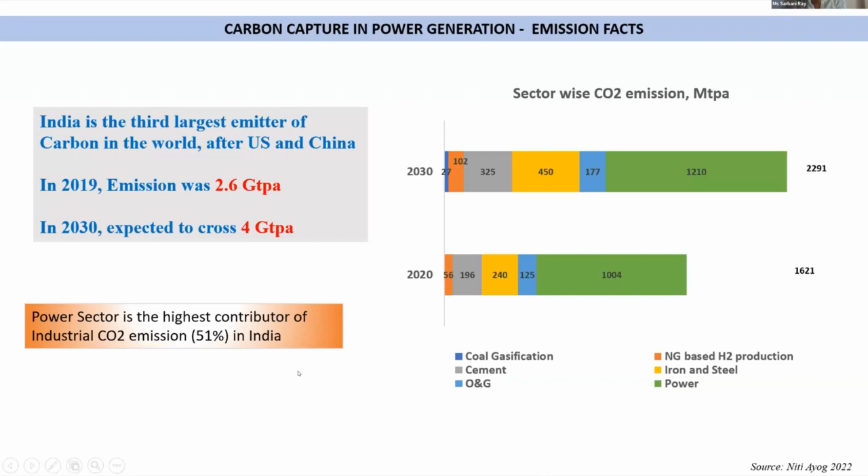But anyway, that will come later. So first we see that the power sector as of now is the highest emitter, highest contributor of industrial CO2 emission, that is 51%. So we need to really worry about the power sector.

So what is the installation capacity and fuel mix? I'm just giving these details because my subject is very theoretical. So renewable is 30% and thermal is 57% in our fuel mix. Last year, by June 22, renewable was 26% and thermal was 60%.

So we are progressing at a very great rate in case of renewable. But is that enough? Renewable has shown a steady increase from last year's 26% to 30% share in the fuel mix, and in the same manner, percentage share of thermal has reduced. India's revised renewable power capacity target is 500 gigawatt by 2030.

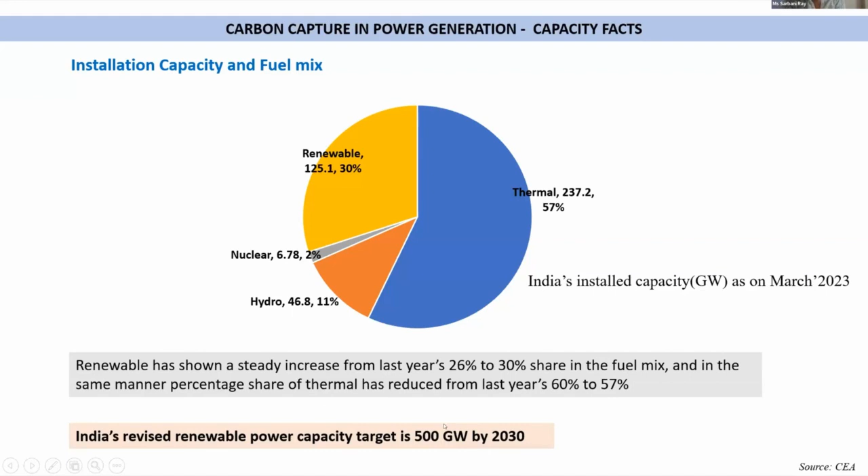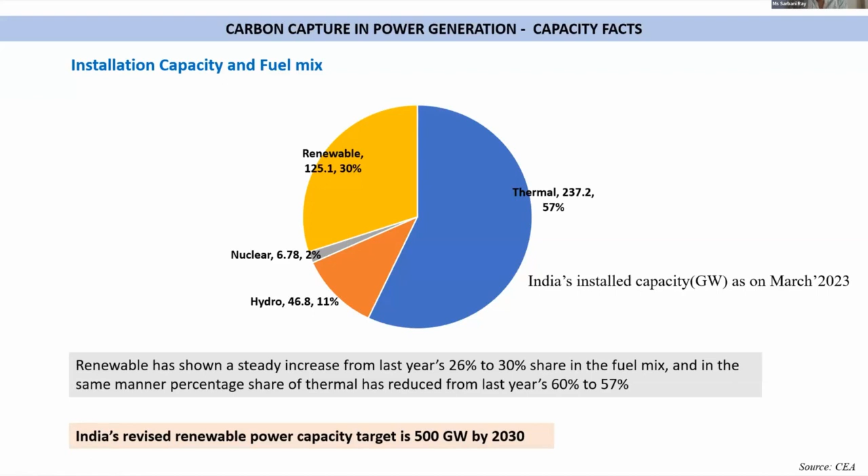Still, if you see our 2022 target, we have done really great on that target. Our policies, luckily the cost, the scale, the learning - everything together - the price has come down and India has done a great thing in renewable capacity addition.

Energy demand of India would increase as per the IEA latest India outlook, by 25 to 30%, and 60 to 70% by 2040. So that's what I was saying - we are in a very comfortable position now as per our per capita emission, but it will not be like that for long, because our demand will increase and our electricity share in the energy will increase since we are on a growth path.

So even with a considerable share of renewable in the fuel mix, coal will be required to meet 50%. That is the IEA prediction in all scenarios, including good scenarios like steps and sustainable development scenarios - still 50% of the electricity demand will come from coal by 2050. So coal would continue to be the major fuel source for the Indian power sector for the following reasons.

If you see the relatively new infrastructure of existing power plants - this has been discussed for some time by IEA and other major energy agencies - that the Asian fleet of power plants, India included, is very new compared to the rest of the world.

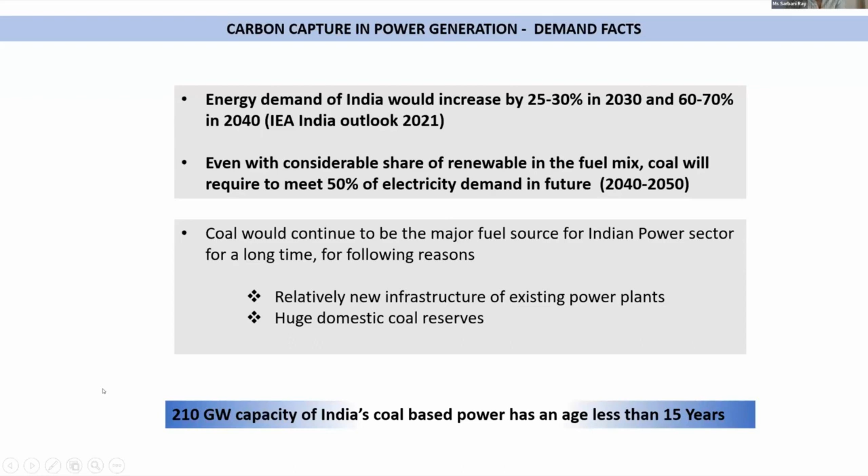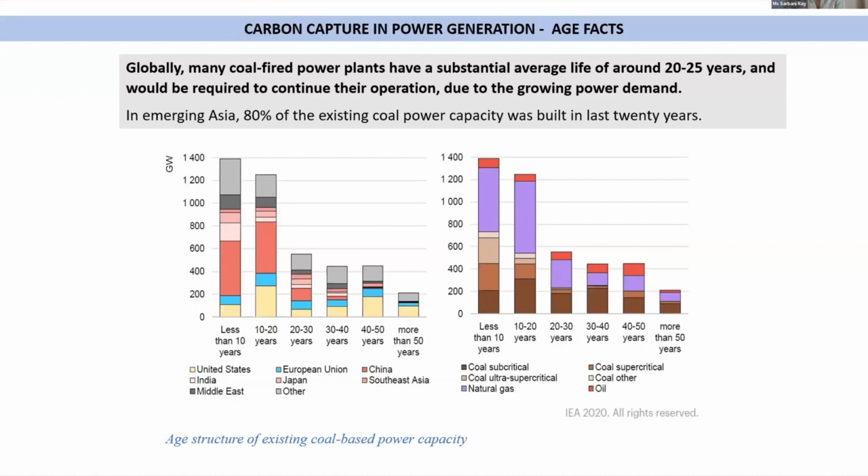So compared to other CO2 intensive sectors, now comes the renewable. Where does renewable stand? Because the power sector has an advantage over other sectors in that it is already going through decarbonization using renewable technology, which has progressed very well over the years. So renewable energy is predicted to achieve 30% of required decarbonization in the power sector. Even in 2050, when renewable power is expected to cross 50% share in the fuel mix, we would require coal power or fossil fuel power, because for us, natural gas is what other people use, a much cleaner option, but we cannot do that, we don't have gas. So due to the variable nature of renewable power, we have to meet base load power demand with coal.

The IPCC working group, the International Climate Panel, has already declared wide-scale deployment of CCS as key to how we are going to do decarbonization. And IEA also, in their sustainable development scenario, has shown that CCUS in power plants would deliver 5% of low carbon electricity. So out of the decarbonization, if 20-30% is done by renewable, 5% decarbonization will surely be done by CCS. That is how they are predicting net zero by 2070. Whichever country is working out a roadmap for net zero, CCS is a part of it. In fact, CCS is the oldest technology being considered as a major tool for decarbonization. It has been there for around 50 years now, but the technology is only evolving recently.

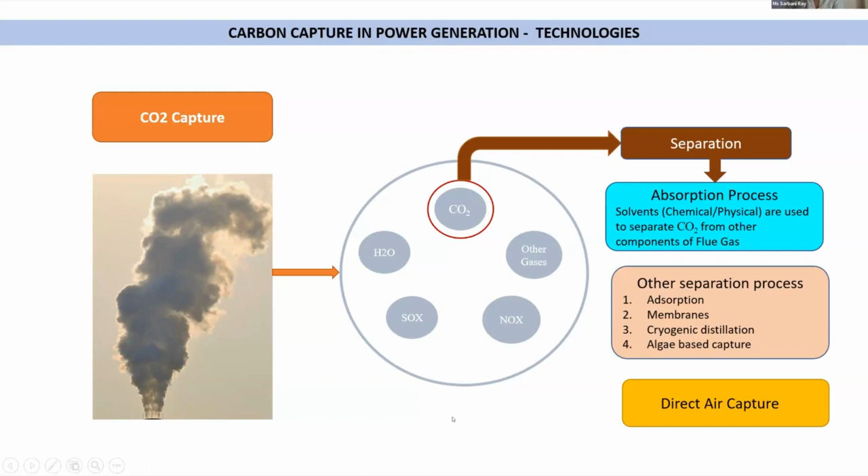There are three main technologies for CO2 capture in power generation: post combustion, pre combustion, and oxy-fuel combustion. Post combustion is when we capture the CO2 after fuel combustion, using separation methods after the fact.

Based on where separation happens, these are the three divisions. Post combustion captures CO2 after fuel combustion, and can be retrofitted to existing plants. It can basically be applied to all types of facilities. Pre combustion is capture of CO2 before fuel combustion. Post combustion, as you see from its color, is the most developed technology.

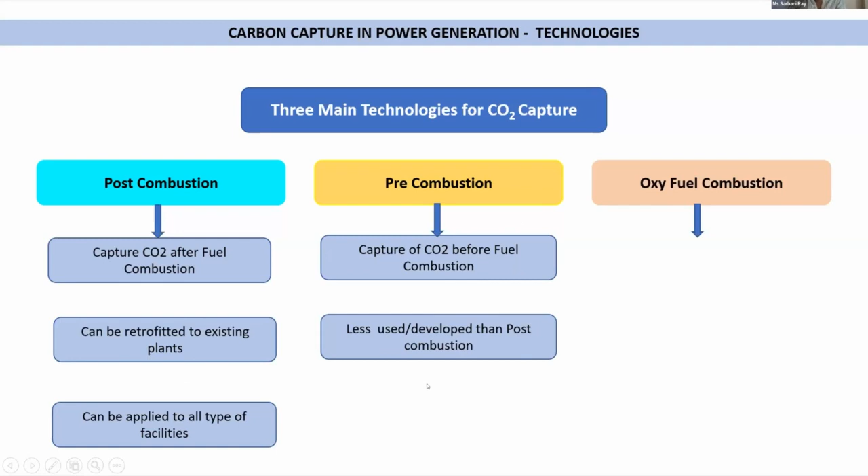Pre-combustion is in early development, capturing CO2 before fuel combustion, and is less developed than post-combustion. It can only be applied to power plants and limited facilities. These are early days for declaring such classifications, because pre-combustion is not developed yet. Something might change in a year or two.

The oxy-fuel combustion method is one people are very attracted to, where capture happens after fuel is injected with near-pure oxygen. For this we need an air separation unit where pure oxygen is generated, and that oxygen is used for combustion instead of air.

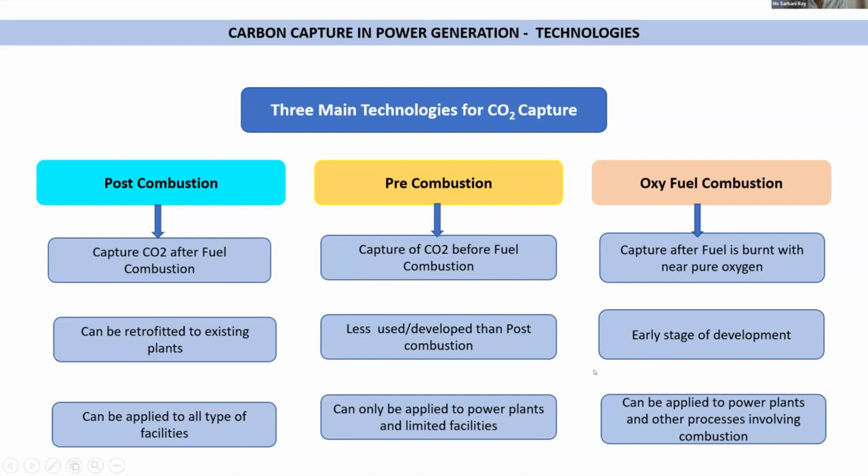This is a very early stage of development, but people are working fast on it because oxy-fuel combustion has its own great advantages. If proven, in later stages we may be using oxy-fuel combustion only for new power plants. It can also be applied to other processes.

Now, the advantages and disadvantages: post-combustion achieves 90% capture, and pre-combustion is also 90% capture. Oxy-fuel combustion achieves 100% capture with the highest degree of purity. The purity of oxy-fuel and pre-combustion methods is not yet fully proven.

That is the best thing about post-combustion: you don't need to change your fundamentals. You can retrofit easily. That's the main advantage, at least for old coal-based power plants. That is the major advantage.

And the disadvantage, of course, is CCS. We need a lot of money for CCS. That is one reason CCS has never developed so much. High capital investment, and energy penalty is very high in case of post-combustion, because the regeneration of solvent requires high steam injection. So energy penalty is almost greater than 30%.

Then there's an increase in generation cost. It will increase the cost because it is taking the steam either from the existing facility or building a new facility to provide power or steam to the CCS. So all of these are actually high capital investment.

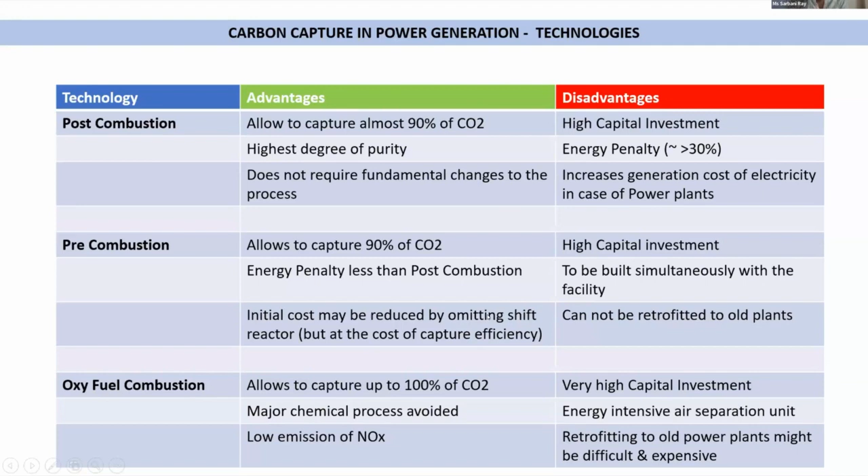So for coal-based power plants, the IEA released that, depending on the maturity levels of the technology, the most suitable technology as of now is post-combustion chemical absorption. All other technologies are in progress. The chemical absorption technology is in early adoption stage, while the rest are in prototype or demonstration stage.

There's also the question of whether to use chemical absorption or physical absorption. For now these two are developed, mature technologies, and the choice depends on your field of application—whether oil and gas, other industries, or power plants—and on the concentration and partial pressure of carbon. In our coal-based power plant flue gas, the concentration of carbon is very low and the partial pressure of carbon is also low. This makes amine-based chemical absorption the most suited technology for coal-based power plants.

So what is your solvent? It depends on whether you use chemical solvent, and what type of chemical solvent you use—that depends on the concentration of CO2 and the partial pressure of CO2.

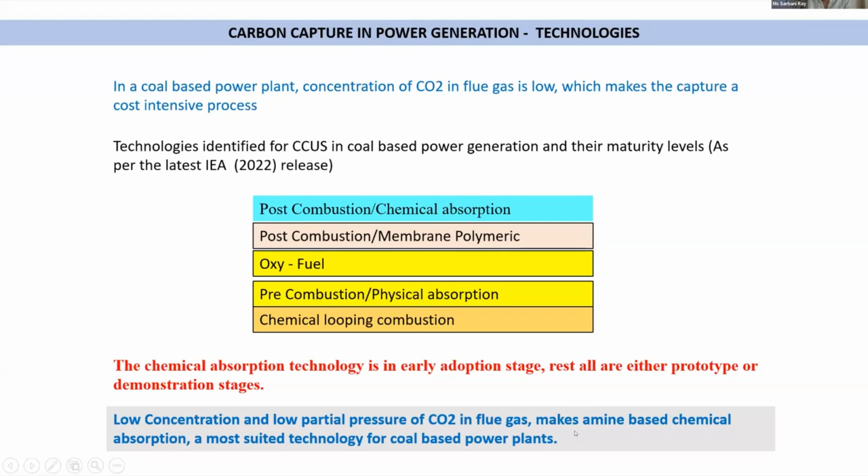This is a typical schematic drawing for carbon capture in power plants, based on post-combustion chemical absorption. The flue gas reacts with the solvent, which absorbs the CO2 in the flue gas. This is an exothermic reaction, so it generates a lot of heat. Flue gas needs to be cooled before sending it to the absorber.

Flue gas cooling is done using a heat exchanger, and then the solvent absorbs the CO2. This CO2-rich solvent goes to another separation tower called the stripper tower. In the stripper tower, the solvent is regenerated using steam, and the CO2 comes out as a pure gas. The lean solvent, without the CO2, is pumped back to the absorption tower using a pump.

Then, depending on the use of CO2, it is compressed and liquefied, and then either stored or transported through a pipeline. That all depends—this is just a typical process.

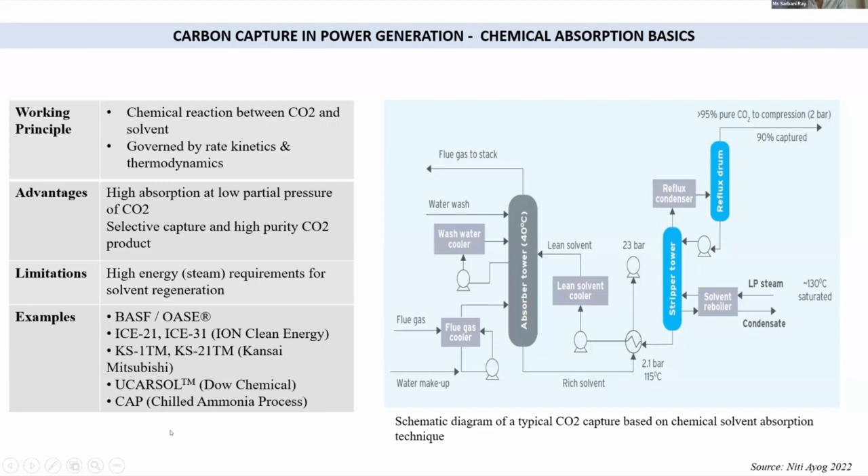Let us see the CCU projects. What is the status? Because as of now, we don't have many projects in the world. In India, of course, none. In IEA Sustainable Development, CO2 captured and storage capacity is estimated to be 5635 MTPA by 2050 for net zero emission.

So you see, it's a huge amount of CO2 captured and storage capacity. So global CCS status report, this is one report that comes every year about the CCS status. You can anytime go through their reports. It's very interesting that almost every day a new CCU project is being declared somewhere in the world.

One thing is strengthening of policy framework. Everybody after COP, not only COP26, I think much before that, they have started doing the policy framework. US, if you see the 45Q tax credit, then EU Green Deal climate policy, they have introduced these policies which actually favored CCUS.

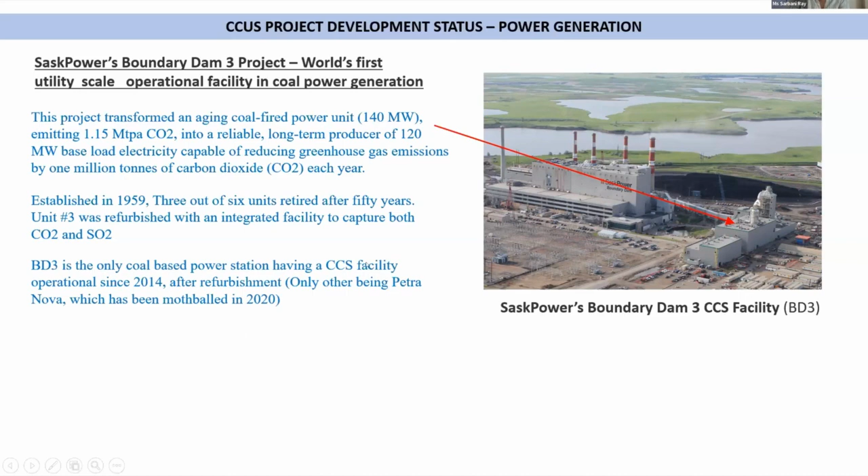Boundary Dam 3 is the only coal-based power station having a CCS facility operational since 2014. It was a 140 megawatt power station, and after retrofit, it became a 120 megawatt base load electricity plant. It operates using post-combustion chemical absorption technology for both CO2 and SO2.

That's another thing, because they needed to capture SO2 also. If you go through Boundary Dam 3, they are very transparent - they have all the documents and everything available in the public domain. So if you read about the Boundary Dam power station, you can see how they decided on the technology.

This power plant is a prototype for all other coal-based power plants in India and other parts of the world, where we can learn from their experiences. According to UNFCCC, the Boundary Dam power station is typical of most coal-fired power stations, and generally a typical power plant of any size throughout the world. So this can be a model for going forward with coal-based power.

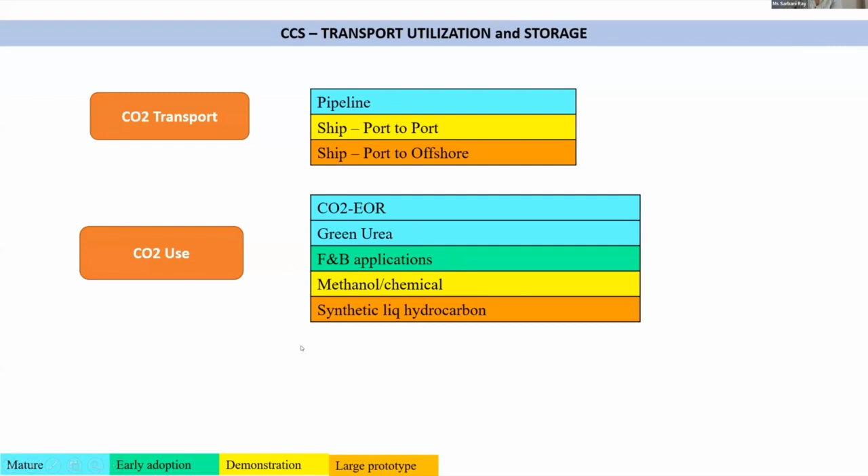Pipeline transport is one of the oldest, mature technologies and is expected to remain a major technology for CCS. You capture CO2 in one place, then compress and liquefy it, and then transport it through pipeline. If you want to transfer a high volume of CO2, that's the only option.

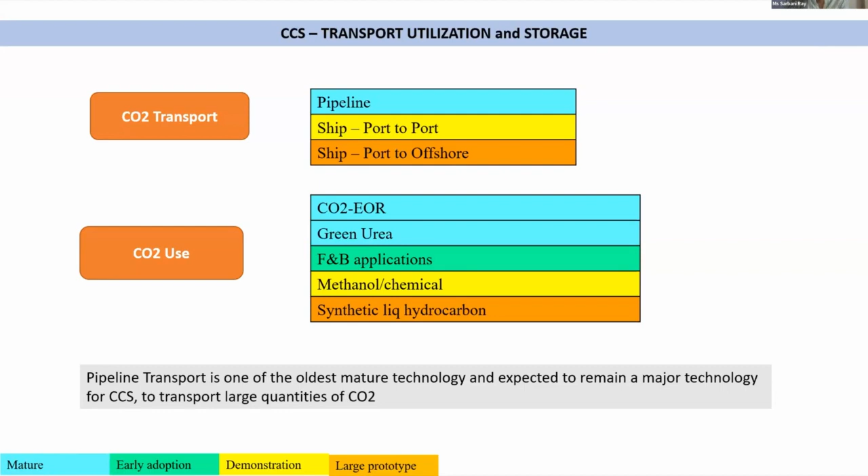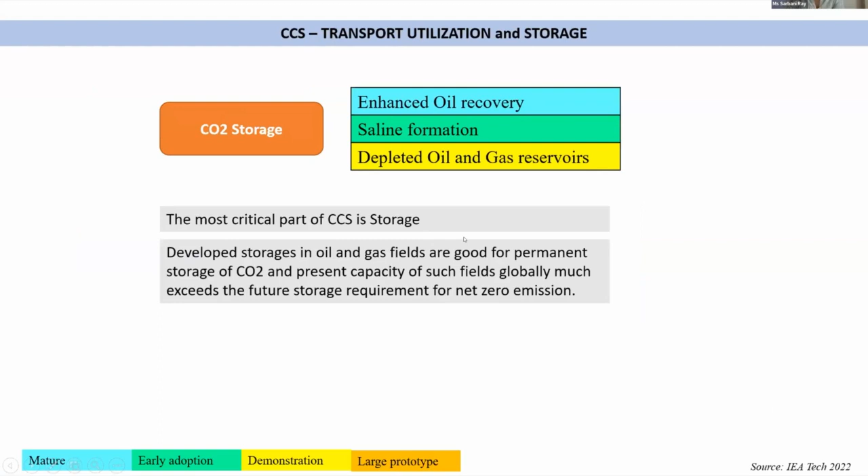Then there's CO2 storage. Again, for CO2 storage we have options - enhanced oil recovery, which is a major mature technology, and then saline formation and depleted oil and gas reservoirs. The most critical part of CCS is storage. Developed storages in oil and gas fields are good for permanent CO2 storage.

At present, what we can do is use that CO2 for oil recovery, or store it where we have oil fields - the storage for oil and gas fields which are not used anymore. We can just keep the CO2 there without using it, store it in the oil field.

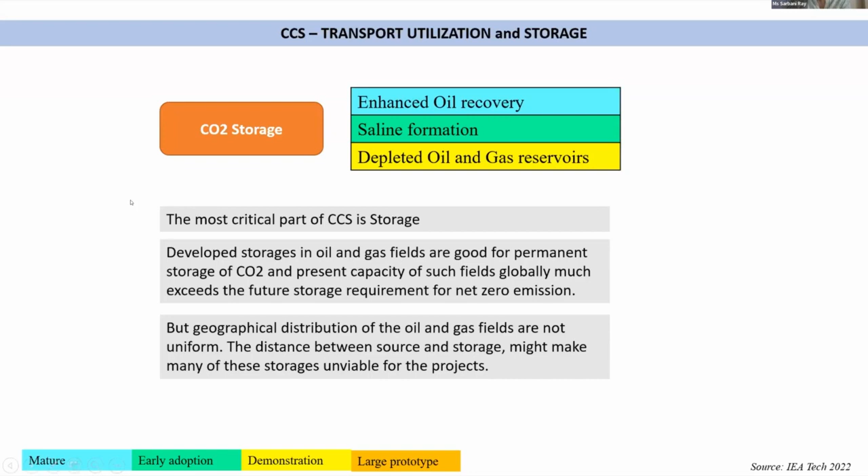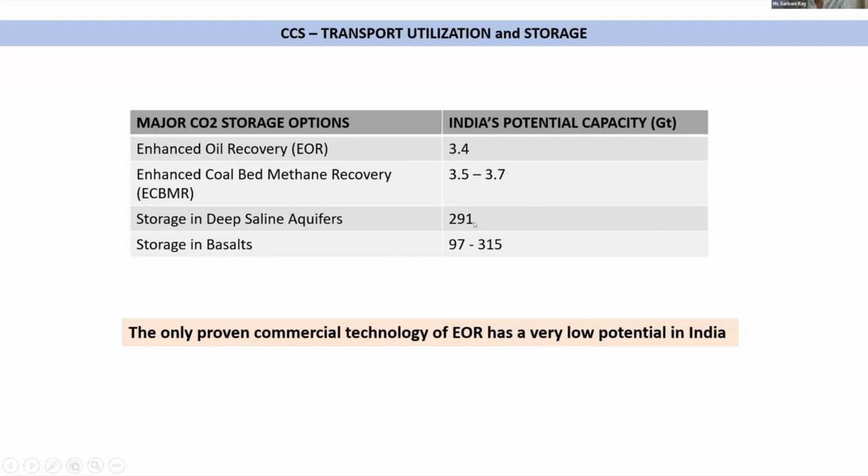I will share the presentation, more than 12,000 billion tons, because a global CCS storage assessment has been done, and it says that we have enough storage capacity. But the problem is that it's not in one place - it's not uniform, it's random.

So for CCS, in absence of direct revenue generation - I'll come to the last part now, policy development - CCS projects are capital intensive, and this requires much policy intervention. We've seen that renewables also needed policy intervention to pick up momentum. So for CCS also it is like that. Wherever there is policy advancement, CCS is doing well.

Canada has an investment tax credit, the US has a 45Q tax credit, and there's a low carbon fuel standard in California. Some countries don't have a direct CCS policy, but they are including CCS in their climate policy. Australia, Japan, and in Asia, Malaysia and Indonesia have a CCS-specific regulatory regime, and China has included CCS in its climate finance.

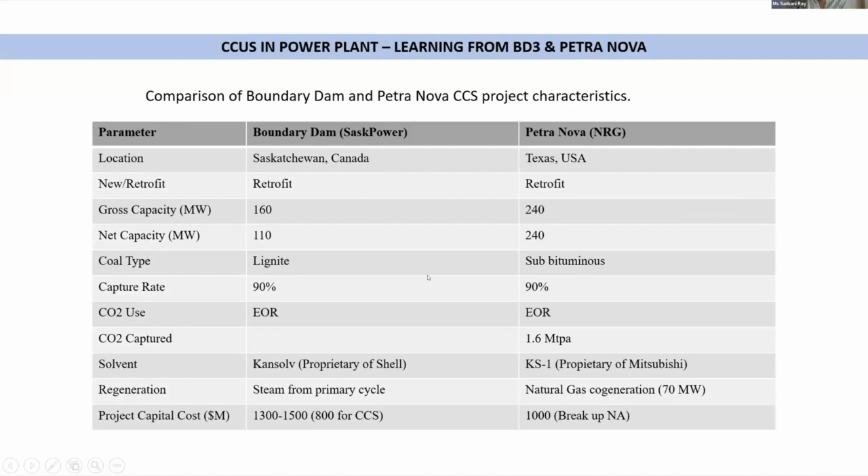This you can go through - this is Boundary Dam. People interested in power generation can see the Boundary Dam and Petra Nova details. Basically, both facilities were relying on EOR and capture.

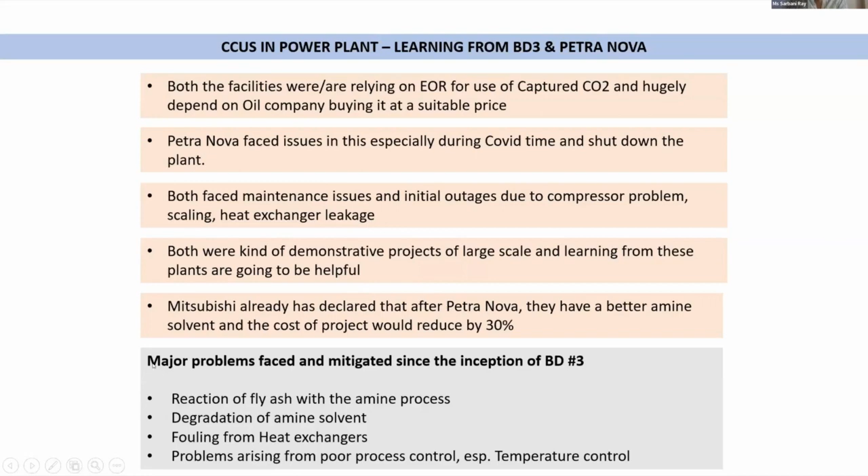So again, use and storage is very important for installing CCS in power plants. Only policy incentive or environmental norms are not enough to give it market-commercial level viability - you have to have users and storage in place. But the advantage we have from Boundary Dam and Petra Nova is that costs are coming down, and they have better solvents after the experience. The suppliers and vendors have already gained a lot from these two facilities, which other coal power plants will build on going forward.

Sarbani ji, can we please take up the Q&A session now and move ahead?

Just two more slides, sir. This is the conclusion: deployment of CCUS in power generation would need extensive support from policymakers.

Complete policy-based guidelines need to be in place in selection of power plants and retrofitting them. Government needs to facilitate development of carbon storage in a hub or cluster model. Not only India, but all other countries will be going for this hub and cluster model due to non-uniformity in storage. In India, CCUS policy would probably be integrated with climate policy and emission-related policy within the framework of regulatory norms for emission. Thank you.